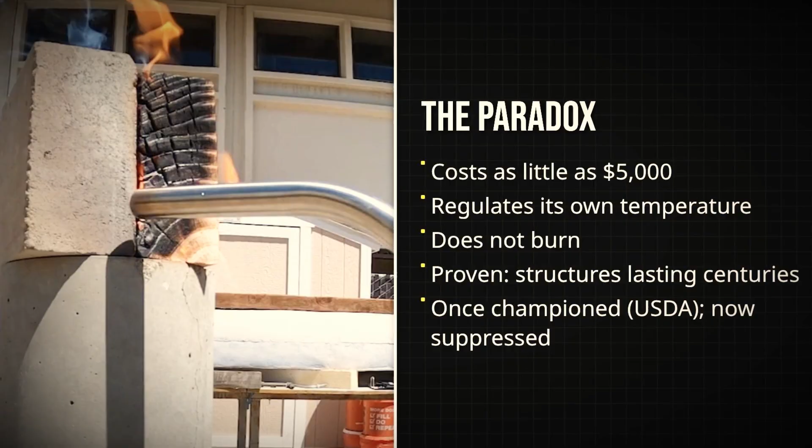In 1926, the U.S. government declared compacted earth the cheapest permanent building material in existence. Homes made from it have survived 500 years. They cost as little as $5,000, regulate their own temperature, and do not burn. Yet across most of America, you can't finance one, can't permit one, and can barely build one. Not because the science failed, but because someone profits from making sure you never try.

Roughly 7,000 years before the first American mortgage, ordinary villagers in what's now central China were building homes that could outlast empires. At Banpo, near the banks of the Yellow River, families dug wide, circular pits into the ground and lined the walls with thick layers of damp clay. The process was simple, but exacting. Handfuls of earth were pressed and packed by hand, each strike echoing through the soil, until the walls grew dense enough to stand on their own. No mortar, no bricks, just the physics of compression and the patience of repeated blows.

These pit houses, some dating as far back as 4,800 BCE, sheltered generations through bitter winters and humid summers. The walls, half sunk below the frost line, trapped warmth from the communal hearths and kept out the damp. Above, timber frames and thatched roofs finished the job. Archaeologists have traced the outlines of these ancient dwellings, circles and squares clustered around a central plaza ringed by a defensive moat. The labor was shared by everyone, no architects, no specialists, just a community shaping the earth beneath their feet into something permanent.

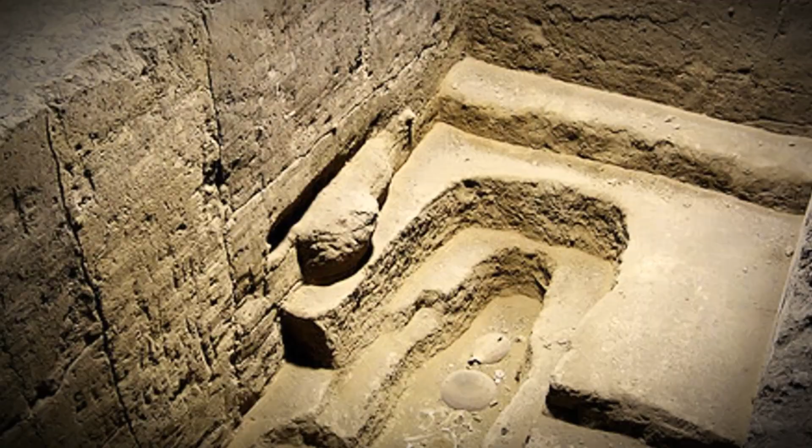In the mountains of Fujian, China, entire communities took the logic of earth building and scaled it to monumental proportions. The Hakka people constructed the Tulou, massive fortress-like dwellings with walls of rammed earth up to 2 meters thick. These structures weren't just homes, they were self-contained villages, some housing up to 800 people behind a single circular wall. The oldest Tulou, still standing, date back more than 500 years. Their walls, packed layer by layer with local soil, gravel, and lime, have survived earthquakes, typhoons, and even cannon fire.

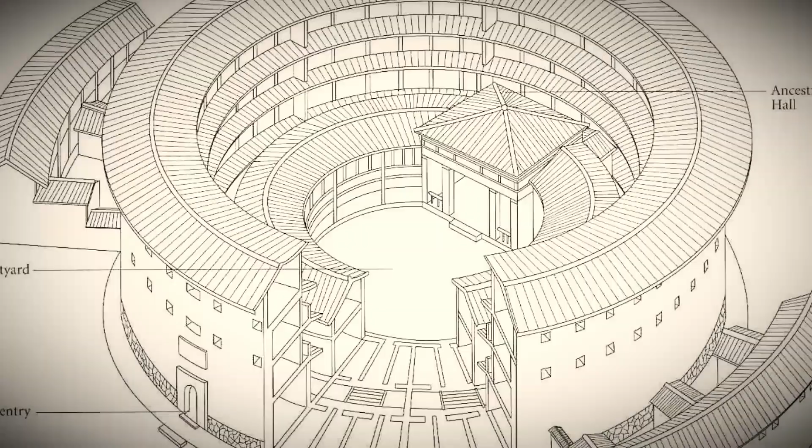UNESCO recognized 46 of these Tulou as World Heritage Sites in 2008, citing their unique blend of communal living and military defense. The engineering is as impressive as the scale. A Tulou's rammed earth walls can rise 4 stories high, forming a near impenetrable barrier that keeps out both weather and invaders. Inside, families share kitchens, wells, and courtyards, living in a structure that endures for centuries without concrete, steel, or modern insulation. The Tulou prove that earth, when properly built, can support not just a family, but a whole society, generation after generation. Their survival is not an accident, but a testament to the material's strength and the community's trust in its lasting power.

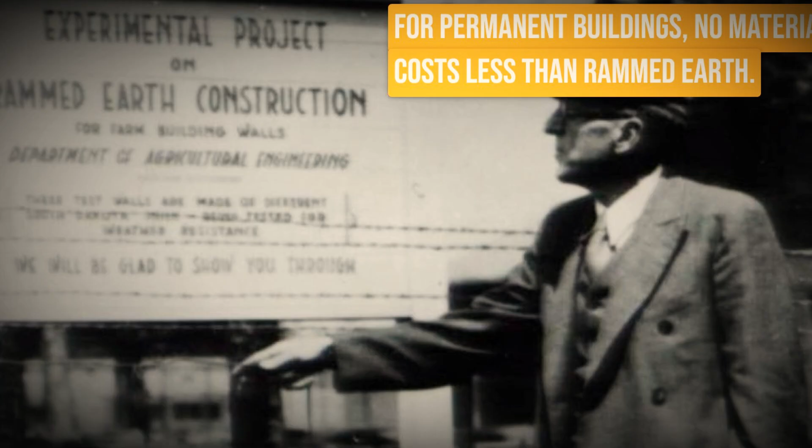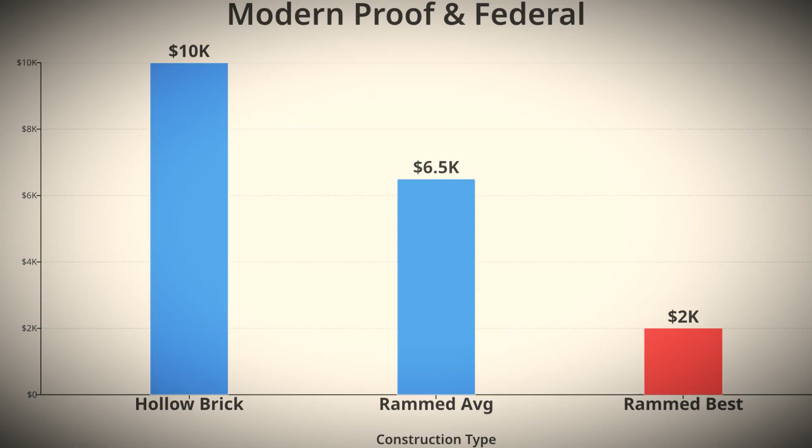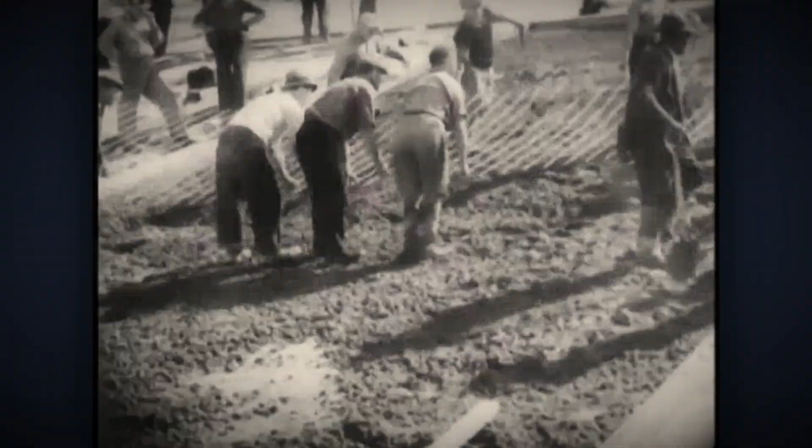In 1926, the United States Department of Agriculture published Farmers' Bulletin number 1500. The message was blunt. For permanent buildings, no material cost less than rammed earth. USDA engineers compared actual construction costs across the rural South and Midwest. Their findings: rammed earth walls averaged 35% cheaper than hollow brick, with one test site showing an 80% cost advantage. The method needed no imported materials, only local soil and simple wooden forms. 2 or 3 unskilled workers could build 54 square feet of wall per day, with labor rates a fraction of what skilled bricklayers demanded. The bulletin didn't just argue theory. It detailed exact labor, soil, and wall thickness, even warning that the right mix of clay was essential for strength.

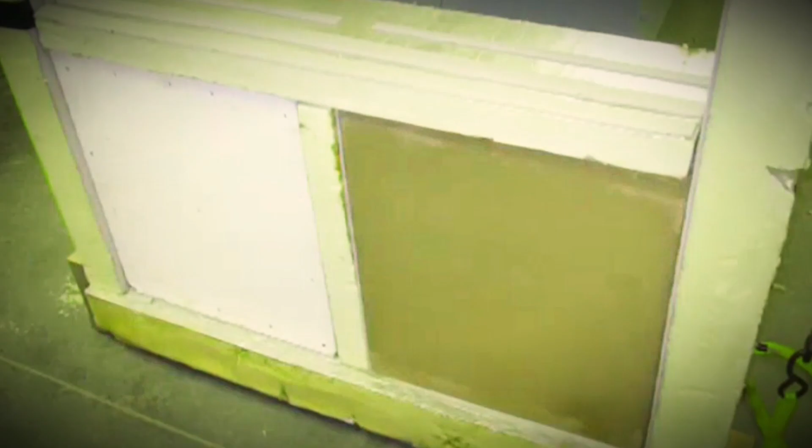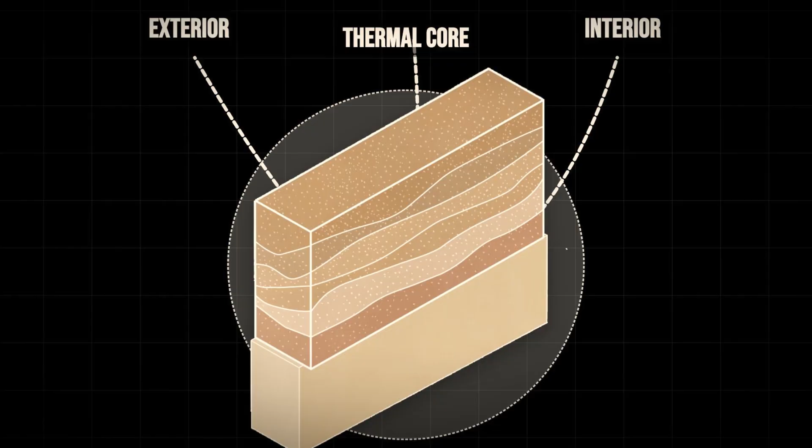Decades later, laboratory studies would confirm what those field trials suggested. In 2008, researchers Hall and Allinson measured the thermal conductivity of rammed earth at 0.64 to 1.01 watts per meter Kelvin, a range that means walls act as thermal batteries, absorbing heat by day and releasing it at night. Their year-long humidity tests found no mold, thanks to the material's ability to buffer moisture and keep indoor air dry. Rammed earth's performance is not a folk legend, but a fact, proven by both government engineers and modern science. The evidence is clear.

This is a building method that delivers on cost, durability, and comfort. In 1936, the Federal Housing Administration, the FHA, issued a warning to mortgage appraisers. Homes built with unconventional materials were to be treated as freakish, a word printed right in the official underwriting manual. This label wasn't just an insult, it triggered real financial penalties.

If a house didn't match the standard blueprint, such as wood frame, brick veneer, or poured concrete, lenders could slash its appraised value by up to 15%, sometimes more. The logic was simple and brutal. Non-conforming meant risky, and risk meant less money on the table. For a family hoping to build with rammed earth, that meant a smaller loan for the same piece of land or a higher down payment than their neighbors. The penalty was baked into the system, enforced by the very people who controlled access to the American dream.

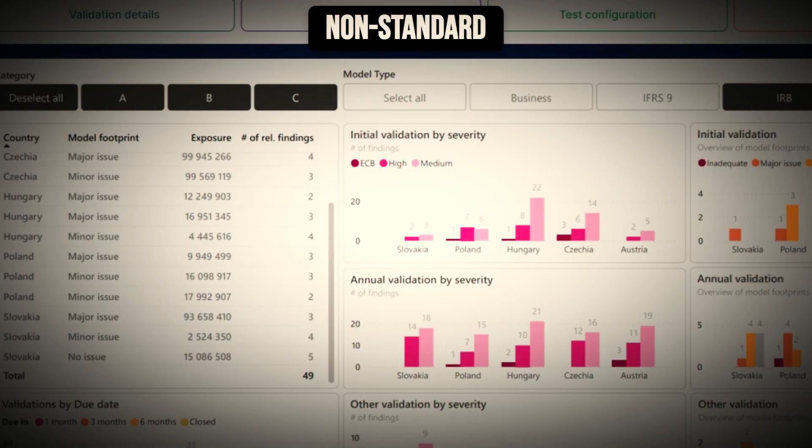These rules didn't fade with time. Fannie Mae adopted the same stance, instructing appraisers to discount any structure that didn't fit the mold. Even today, automated valuation models flag earth homes as non-standard, pushing loan-to-value ratios lower and making it harder to qualify for a mortgage. The result? A building method proven to last centuries and to cost less than brick is forced into a financial straitjacket. The gatekeepers aren't engineers or scientists, they're lenders, following a playbook written nearly a century ago.

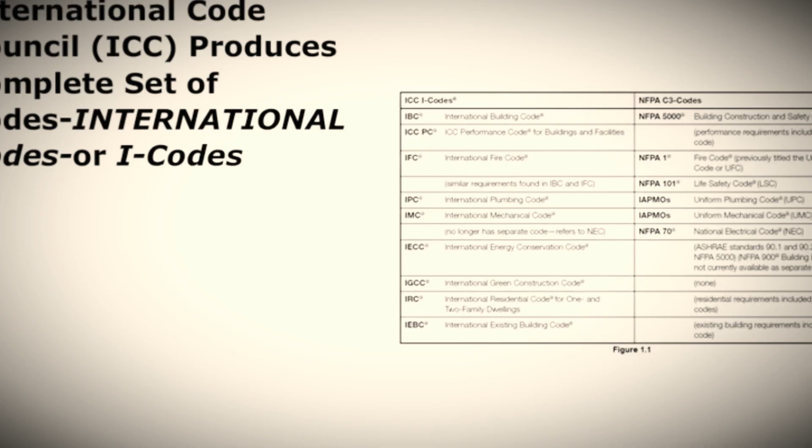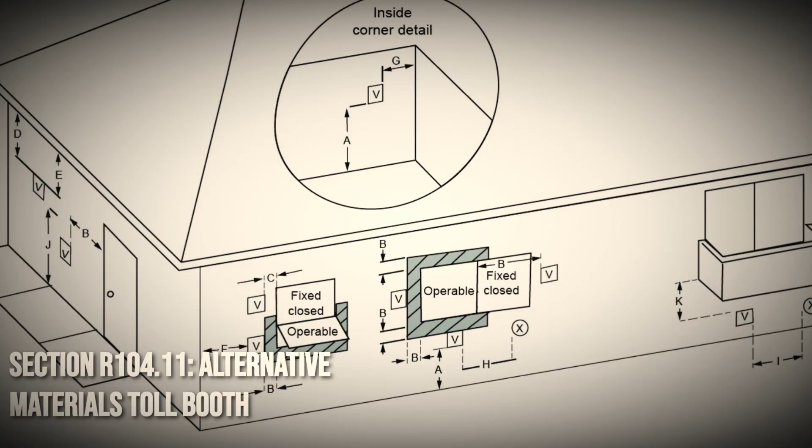In the official rule book for American homes, the International Residential Code, rammed earth barely exists. There are tables for wood, steel, and concrete, but not a single prescriptive pathway for compacted soil. Anyone hoping to build with earth in 49 states faces a paperwork toll booth: Section R104.11, the so-called Alternative Materials Clause. This means paying for a licensed engineer to design every wall, running laboratory tests on soil samples, and submitting reams of documentation for each new project.

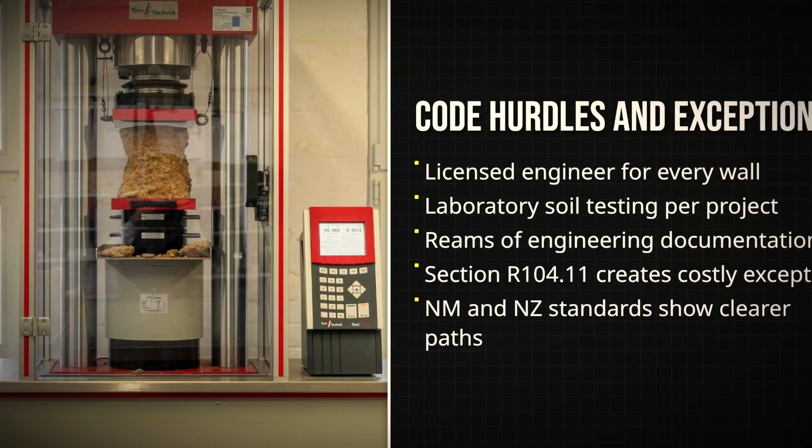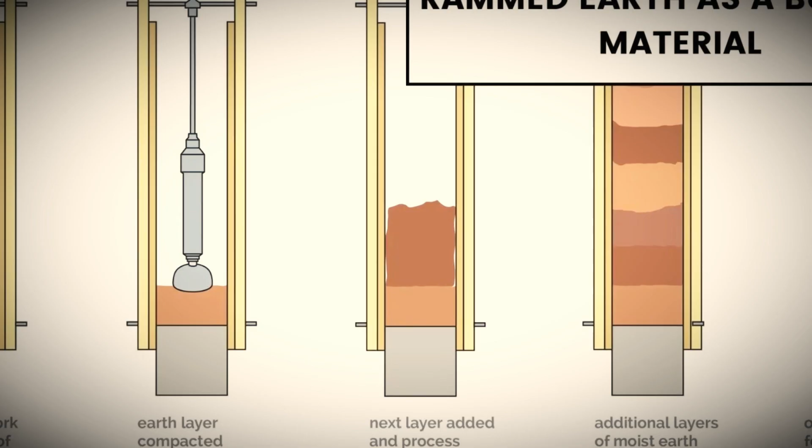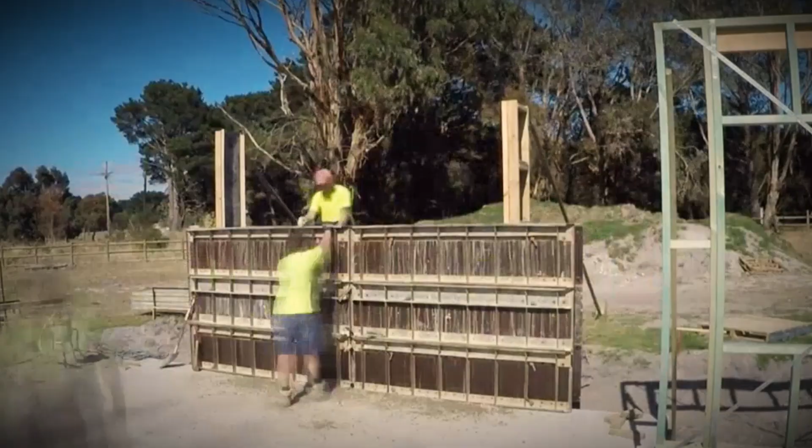The price tag for this process can reach $12,000 or more, sometimes double the cost of the walls themselves. The code's silence is not a technical oversight, it's a policy choice that puts rammed earth in a legal gray zone, out of reach for most families. Yet the barrier isn't universal. In New Mexico, the building code spells out exactly how to build with earth. Minimum wall thickness, a compressive strength of 300 pounds per square inch, and no engineer required for standard designs. Permits are granted based on clear, published rules.

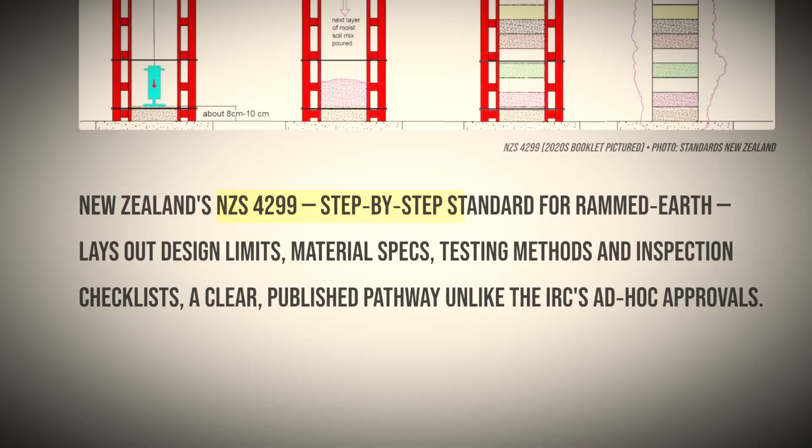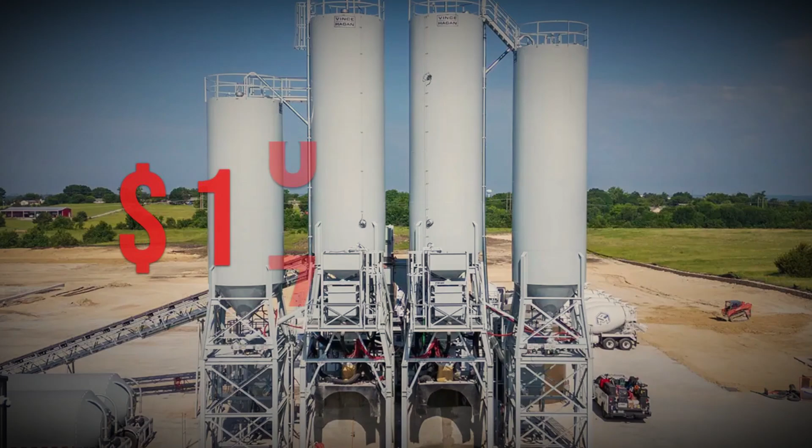Across the Pacific, New Zealand's NZS 4299 standard lays out every step in plain language, allowing builders to follow a checklist instead of hiring consultants. These exceptions prove that the paperwork maze is not inevitable. It's a gate that can be opened or slammed shut by those who write the rules. Every year, American builders pour enough cement to fuel a $17 billion industry. Timber giants like Weyerhaeuser add another $7.1 billion, their profits tied to the constant churn of new construction.

The codebooks that shape what gets built are not written in a vacuum. Trade groups and industry lobbyists hold seats on the committees that update the International Residential Code. Each new edition is a battleground, one where cement, lumber, and drywall have an army of advocates and earth has almost none. Yet the evidence for rammed earth's performance is not locked in the past.

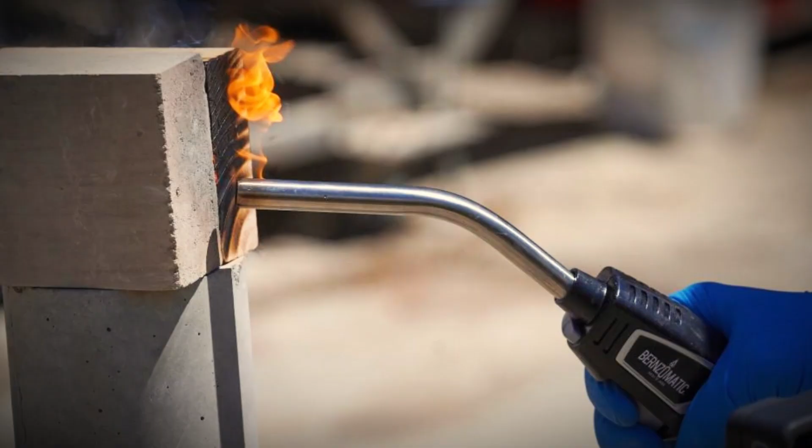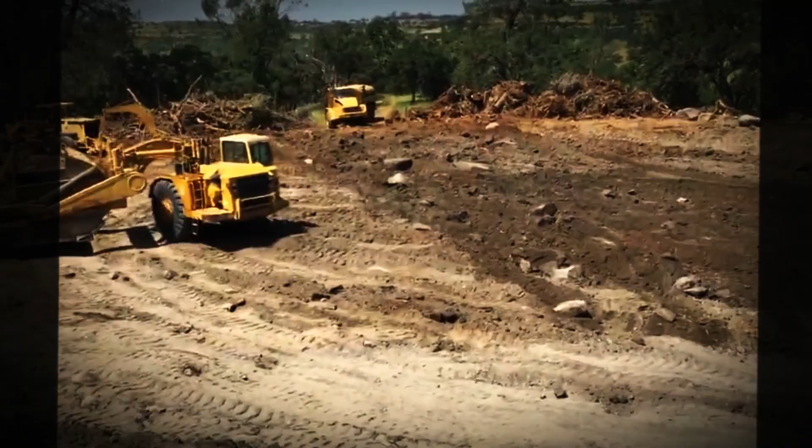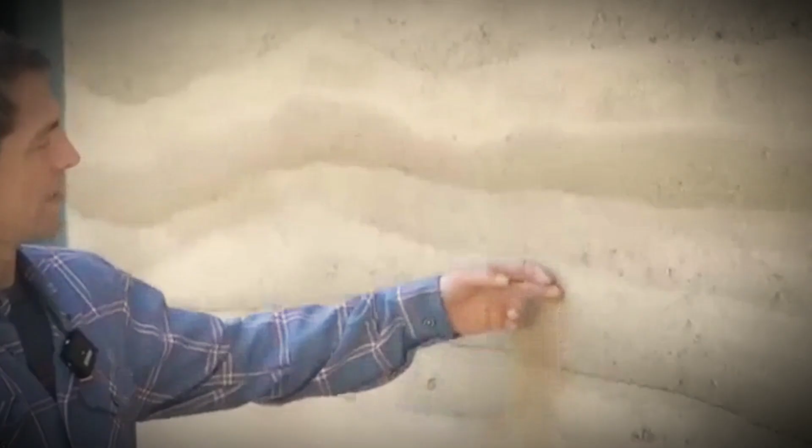In 1983, builder David Easton finished a home in the hills of Northern California, constructed almost entirely from compacted local soil. The house stands off-grid, its thick walls holding steady through decades of rain, drought, and wildfire. No air conditioning, no forced air heat, just the steady comfort of thermal mass, with indoor temperatures rarely straying outside the 60s and 70s, even in the height of summer. Maintenance costs have been minimal. The structure is as solid today as the week it was built, a living rebuke to the idea that earth homes are fragile or experimental.

The numbers are blunt. The incentives are clear, but the proof is right there, sun-baked and silent, standing in defiance of every barrier the system could throw at it. A home that endures centuries and costs less than a used car is sidelined not by science, but by the systems built to protect industry profits. As housing crises deepen, the real barrier isn't mud or stone, it's policy. The future of affordability depends on what we legalize next.